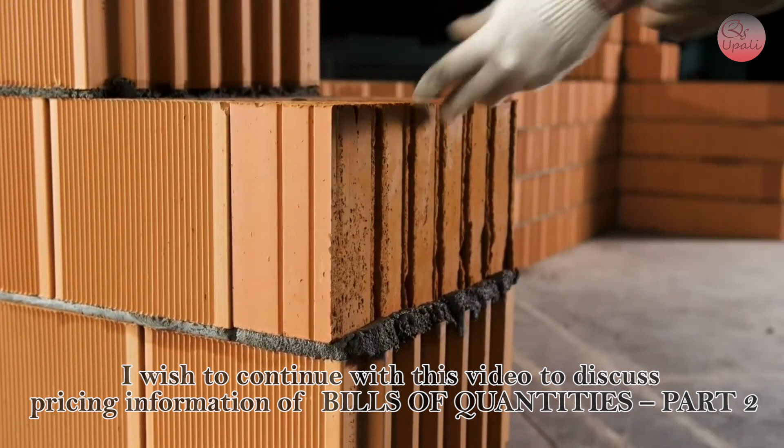I wish to continue with this video to discuss the pricing of bill of quantities part 2. 1. External works continuation. 2. Day works. 3. Soil investigation. 1. External works continuation. Interlock pavers.

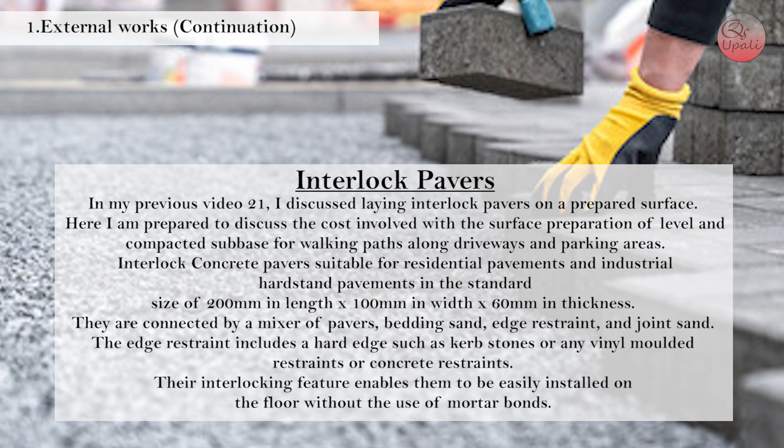In my previous video 21, I discussed laying interlock pavers on a prepared surface. Here I am prepared to discuss the cost involved with the surface preparation of level and compacted subbase for walking paths along driveways and parking areas. Interlock concrete pavers are suitable for residential pavements and industrial hard stand pavements in the standard size of 200 mm in length by 100 mm in width by 60 mm in thickness.

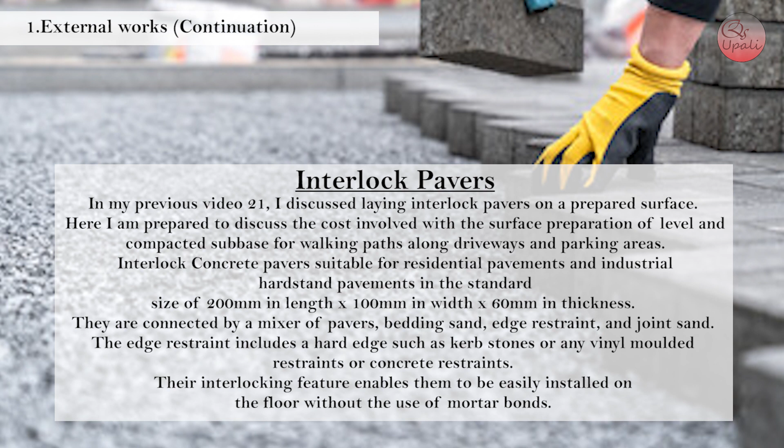They are connected by a mixture of pavers, bedding sand, edge restraint and joint sand. The edge restraint includes a hard edge such as curbstones or any vinyl molded restraints or concrete restraints. Their interlocking feature enables them to be easily installed on the floor without the use of mortar bonds.

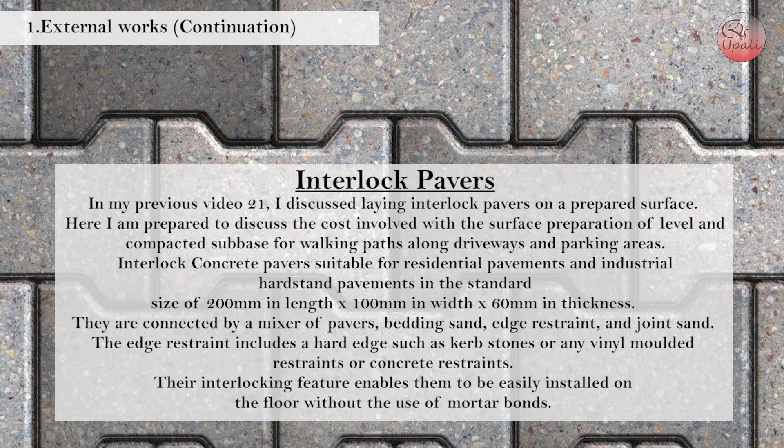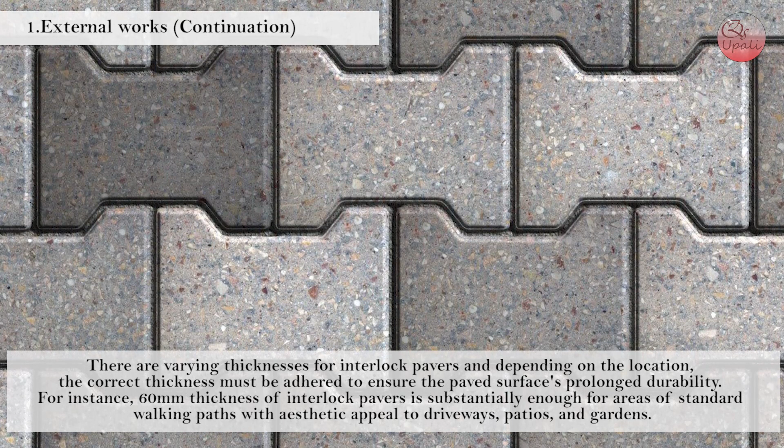There are varying thicknesses for interlock pavers, and depending on the location, the correct thickness must be adhered to ensure the paved surface's prolonged durability. For instance, 60 mm thickness of interlock pavers is substantially enough for areas of standard walking paths with aesthetic appeal to driveways, patios and gardens.

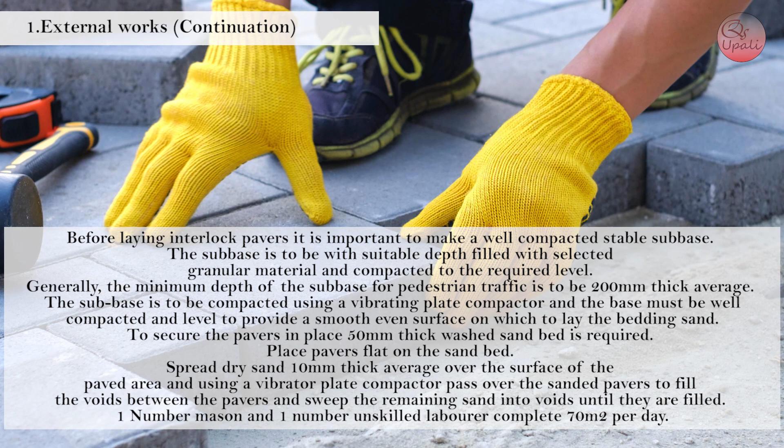Before laying interlock pavers, it is important to make a well-compacted stable subbase. This subbase is to be of suitable depth, filled with selected granular material and compacted to the required level. Generally, the minimum depth of the subbase for pedestrian traffic is to be 200 mm thick average. The subbase is to be compacted using a vibrating plate compactor, and the base must be well compacted to provide a smooth, even surface on which to lay the bedding sand.

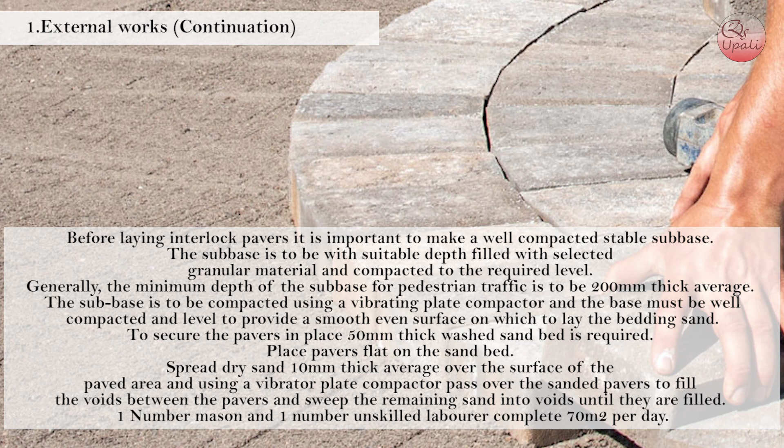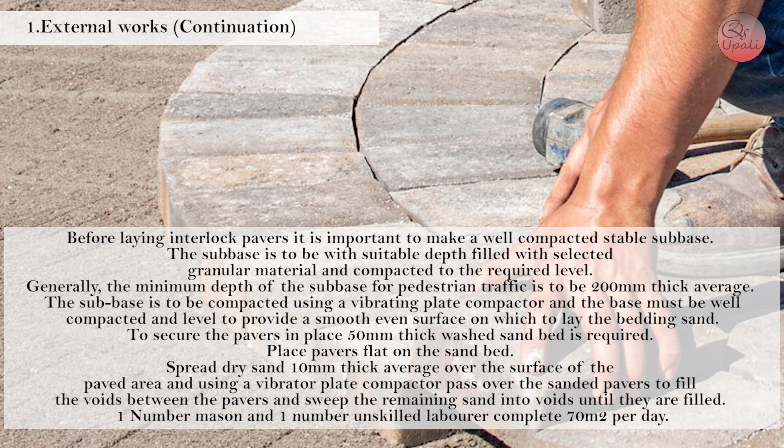To secure pavers in place, a 50 mm thick washed sand bed is required. Place pavers flat on the sand bed. Spread dry sand 10 mm thick average over the surface of the paved area, and using a vibrator plate compactor, pass over the sanded pavers to fill the voids between the pavers and sweep the remaining sand into the voids until they are filled. One mason and one unskilled laborer complete 70 square meters per day.

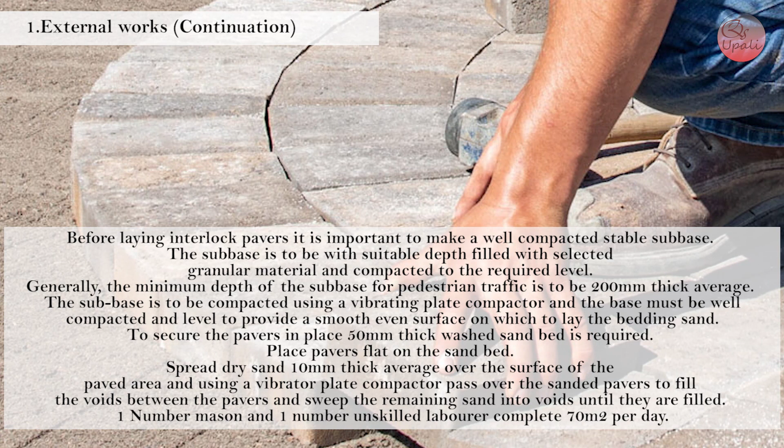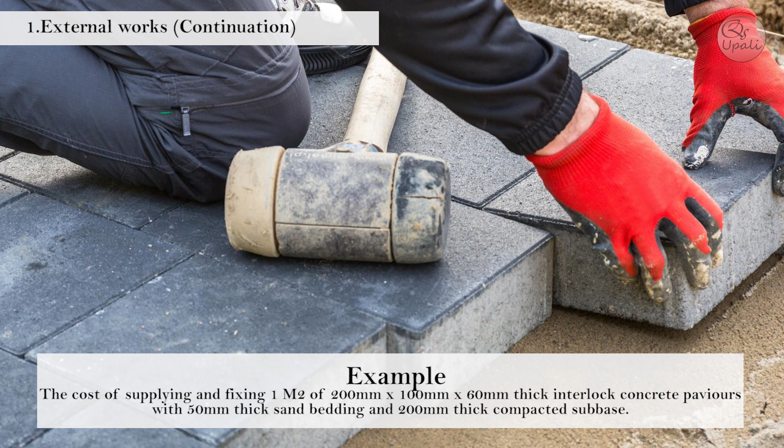Breakdown items of interlock paver work for pricing: 1. Earthworks. 2. Subbase and compaction. 3. 50 mm sand layer. 4. Interlock pavers. 5. Filling voids. 6. Labor for laying. Example: the cost of supplying and fixing 1 square meter of 200 mm by 100 mm by 60 mm thick interlock concrete pavers with 50 mm thick sand bedding and 200 mm thick compacted subbase.

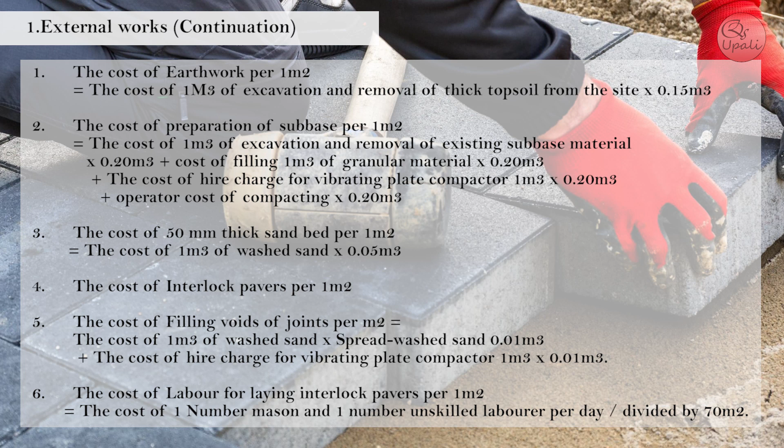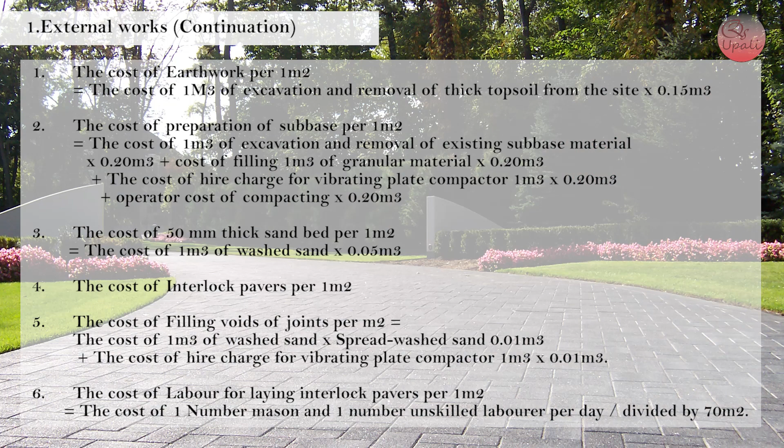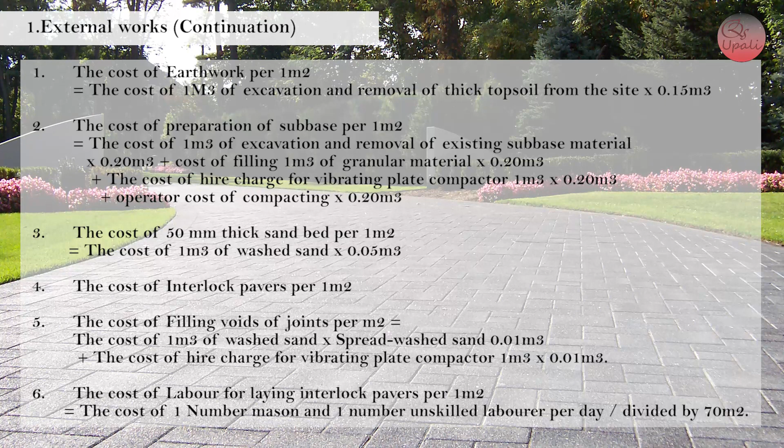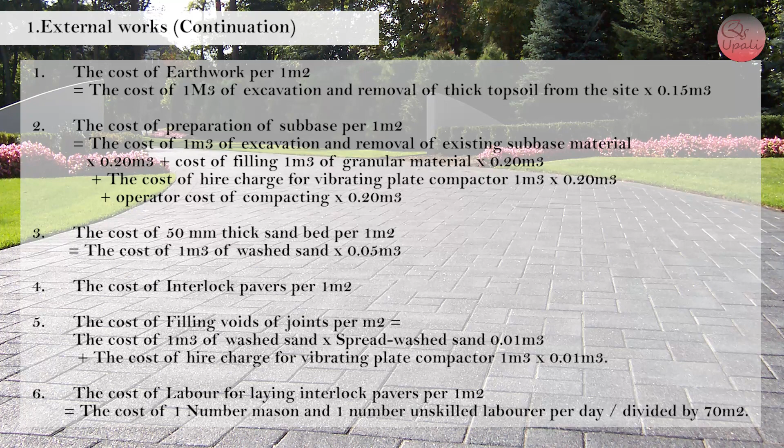1. The cost of earthwork for 1 square meter equals the cost of 1 cubic meter of excavation and removal of topsoil from the site times 0.15 cubic meters. 2. The cost of preparation of subbase per 1 square meter equals the cost of 1 cubic meter of excavation and removal of existing subbase material times 0.20 cubic meters, plus the cost of filling 1 cubic meter of granular material times 0.20 cubic meters, plus the cost of hire charge for the vibrating plate compactor per 1 cubic meter times 0.20 cubic meters, plus the operator cost of compacting times 0.20 cubic meters.

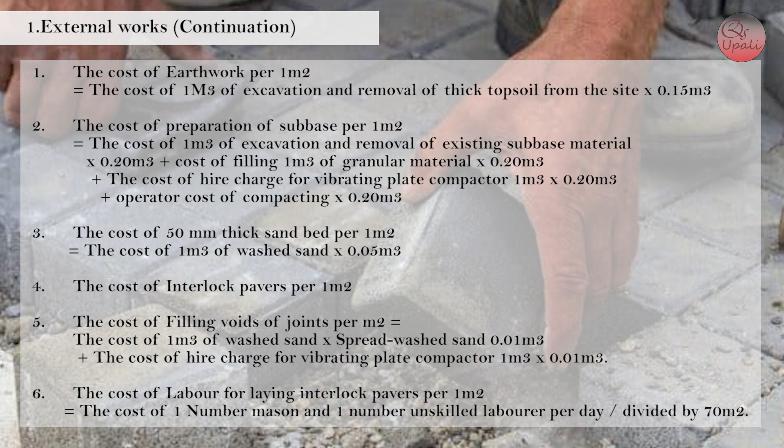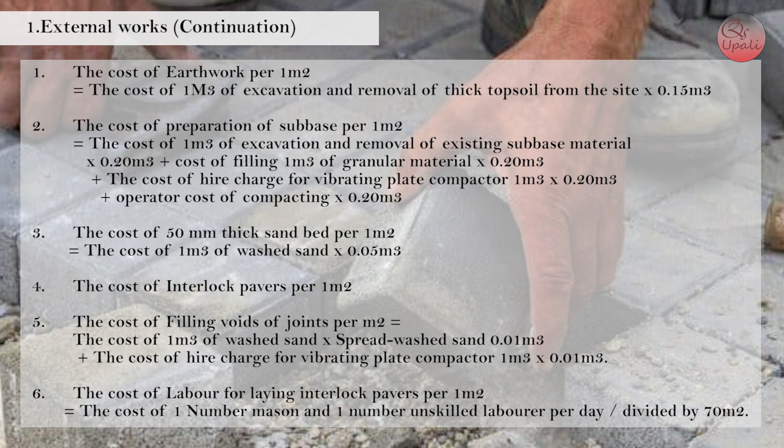3. The cost of 50 mm thick sand bed per 1 square meter equals the cost of 1 cubic meter of wash sand times 0.05 cubic meters. 4. The cost of interlock pavers per 1 square meter. 5. The cost of filling voids of joints per square meter equals the cost of 1 cubic meter of wash sand times 0.01 cubic meters of spread wash sand, plus the cost of hire charge for the vibrating plate compactor per 1 cubic meter times 0.01 cubic meters.

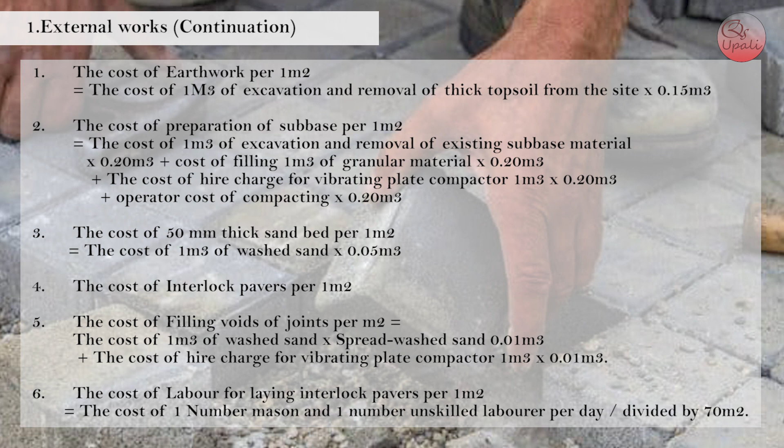6. The cost of labor for laying interlock pavers per 1 square meter equals the cost of 1 mason and 1 unskilled laborer per day divided by 70 square meters.

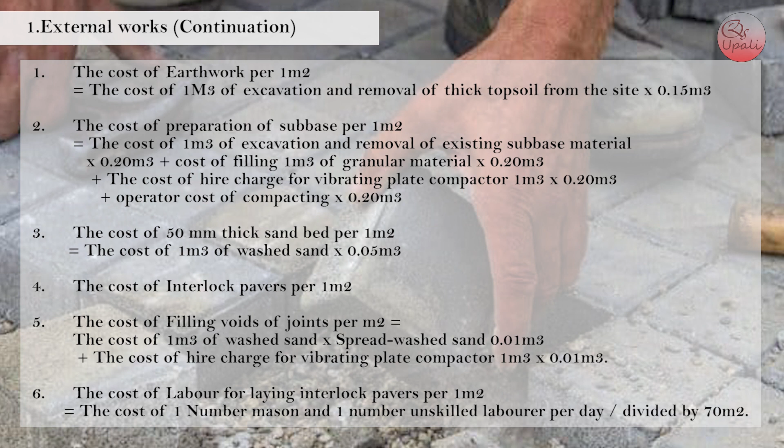Therefore, the cost of supplying and laying 200 mm by 100 mm by 60 mm thick interlock paving tile per 1 square meter equals the cost of removal of topsoil plus the cost of preparation of subbase plus the cost of 50 mm thick sand bed plus the cost of interlock pavers plus the cost of filling voids of joints plus the cost of labor.

2. Day works. Day work is when a contractor is paid for the cost of labor, material and plant plus a markup for overhead and profits. Day works are generally used when an item is specially instructed to be carried out and is not measured or described in the contract document and cannot be valued with the rates described in the contract document.

The contractor shall furnish hourly rates for his labor, material and plant in the tender document under the day work schedule. Based on these hourly rates of labor, material and plant, the contractor submits daily basis rates for a specified work. The contractor shall be solely responsible and assume liabilities for all consequences of operations on a day-to-day basis.

The basic principle of day work is the work done is recorded on a day work sheet together with the labor, material and plant resources utilized to carry out the work. Most standard forms of contract make provisions for variations to be valued daily. The time spent should be as accurate as possible and should be authorized by someone in a position to verify that the resources identified on the sheet have been used to carry out the work described.

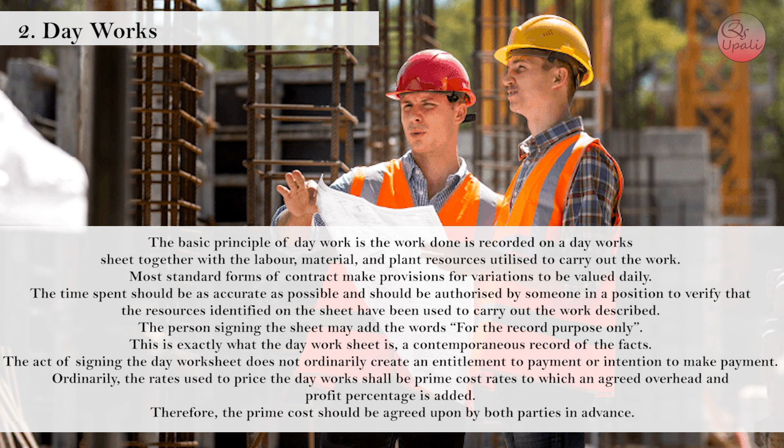The person signing the sheet may add the words "for record purposes only." This is exactly what the day work sheet is, a contemporaneous record of the facts. The act of signing the day work sheet does not ordinarily create an entitlement to payment or intention to make payment. Ordinarily, the rates used to price the day works shall be prime cost rates to which an agreed overhead and profit percentage is added. Therefore, the prime cost should be agreed upon by both parties in advance.

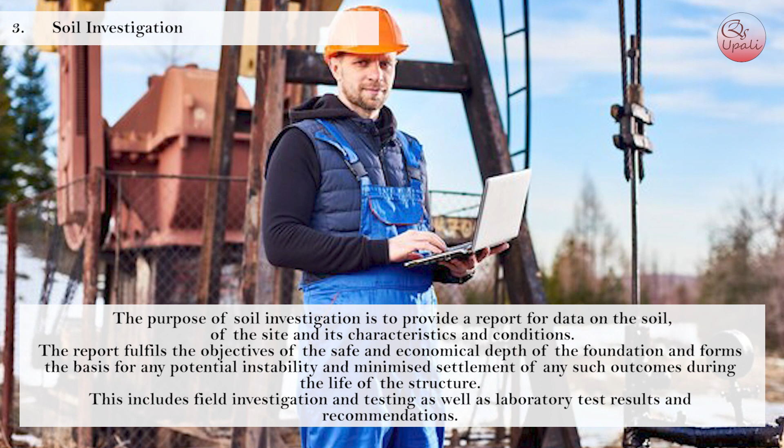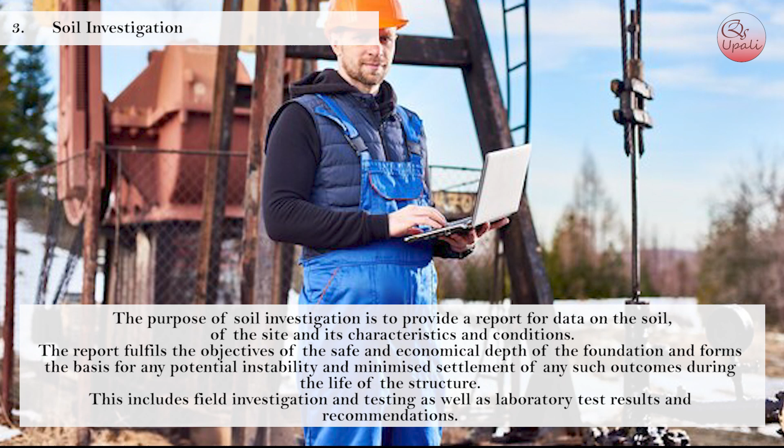3. Soil investigation. The purpose of investigation is to provide a report for data on the soil of the site and its characteristics and conditions. The report fulfills the objectives of the safe and economical depth of the foundation and forms the basis for any potential instabilities and minimize settlement of any such outcomes during the life of the structure.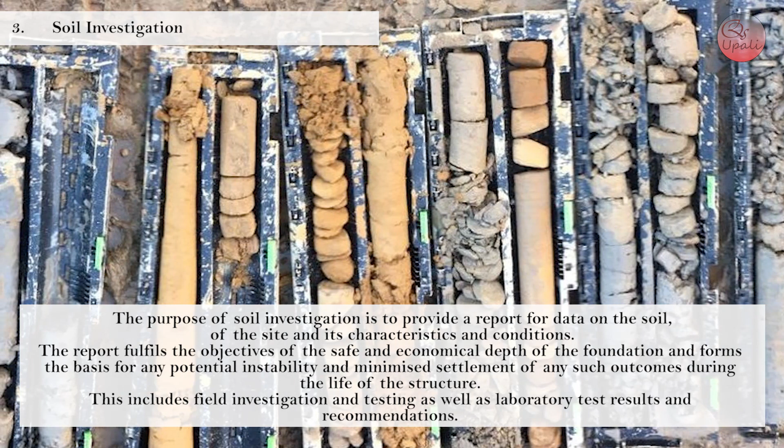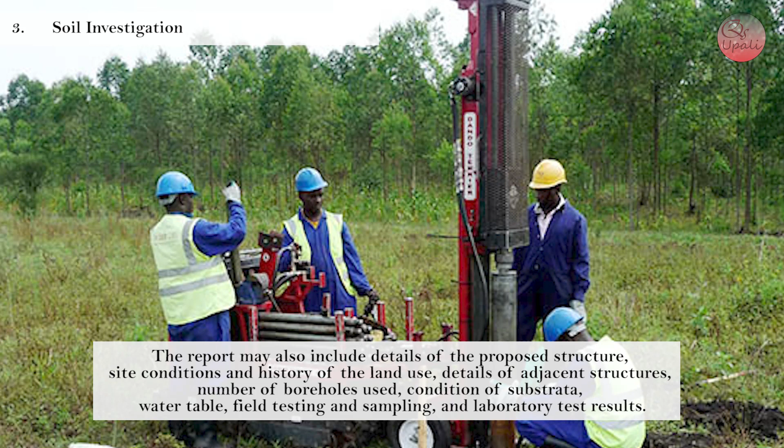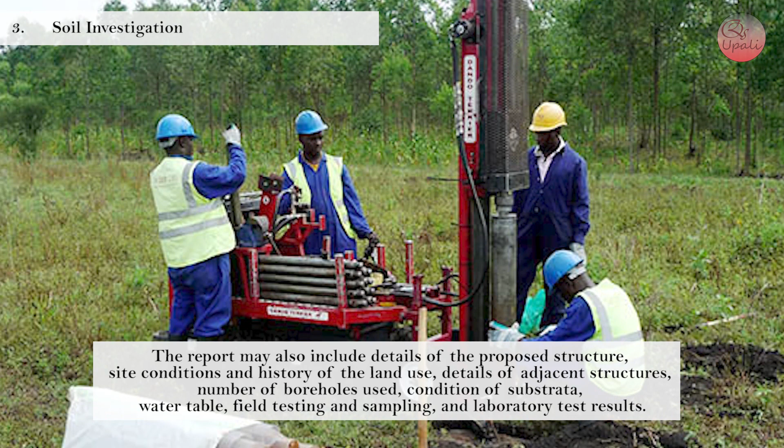This includes field investigation and testing as well as laboratory test results and recommendations. The report may also include details of the proposed structure, site conditions and history of the land use, details of adjacent structures, number of boreholes used, condition of substrata, water table, field testing and sampling, and laboratory test results.